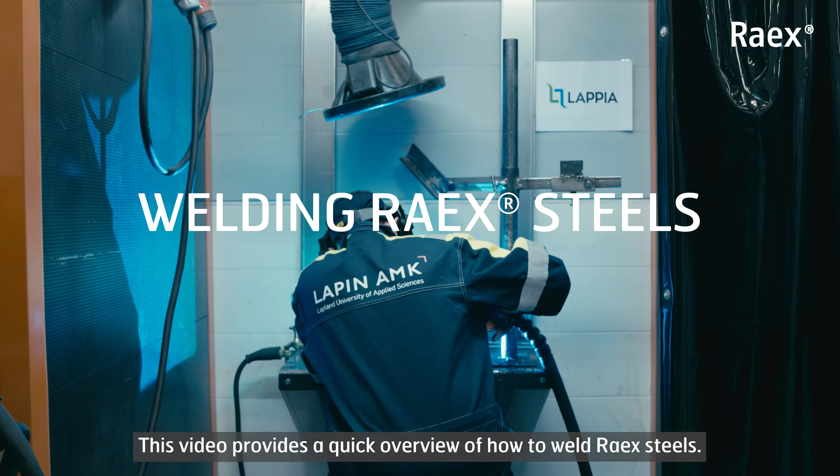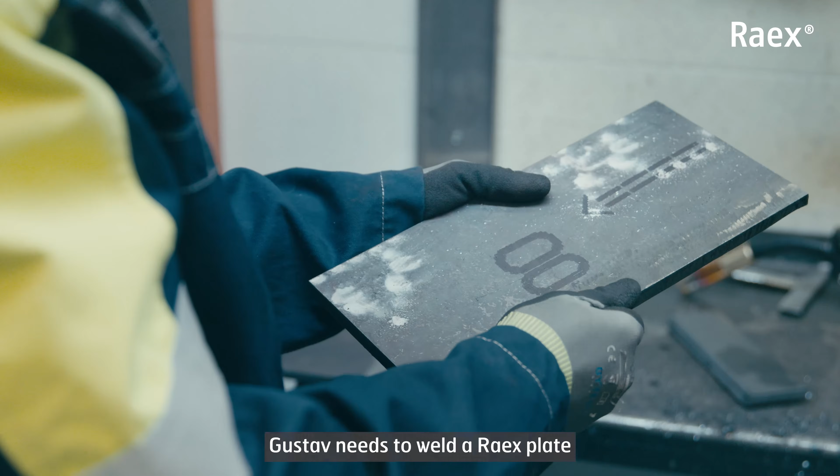This video provides a quick overview of how to weld Raex steels. This is Gustav. He is very particular about his appearance and his work, which is making high-value steel parts. Today, Gustav needs to weld a Raex plate to build an upgraded wear part for his mining customer.

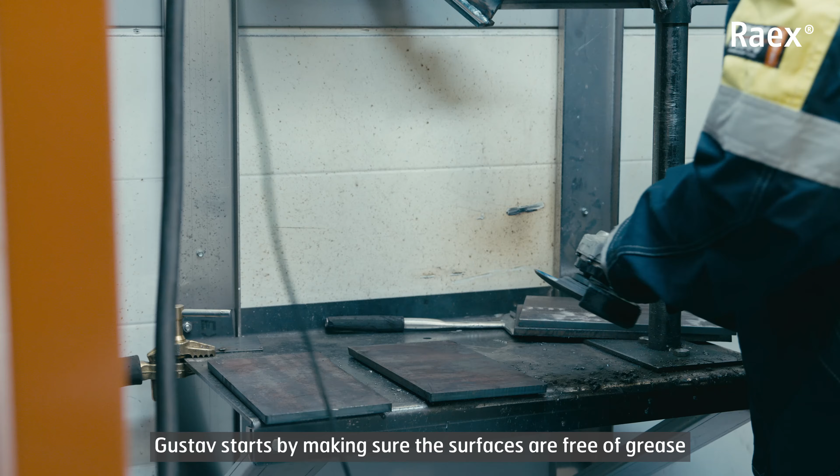Raex is ultra-high-strength steel, so Gustav knows that he must use a low-hydrogen filler metal and the right cooling time for reaching optimal properties for the welded joints. To also reduce hydrogen at the weld spot, Gustav starts by making sure the surfaces are free of grease, scale, oil, dirt, moisture, and paint or primer.

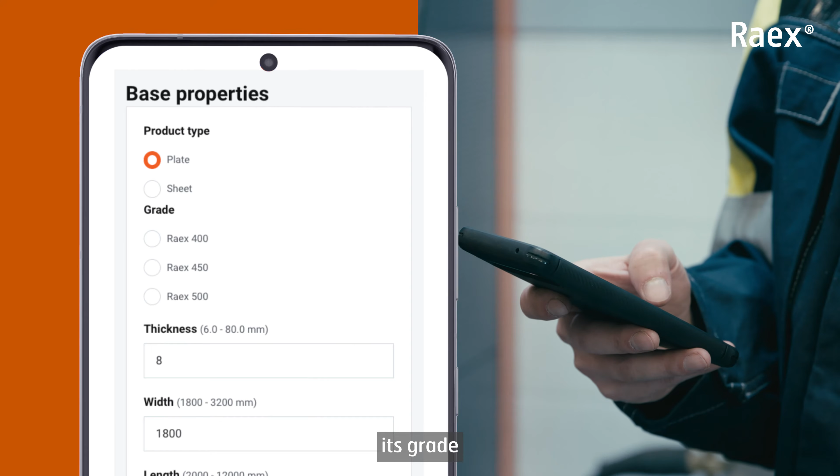To find the recommended working temperature, the amount the plate needs to be preheated prior to welding, Gustav uses the Raex Smart tool at raexsteel.com. On Raex Smart, he enters the product type, its grade, thickness, width, and length. Raex Smart immediately informs Gustav of his preheating temperature in centigrade.

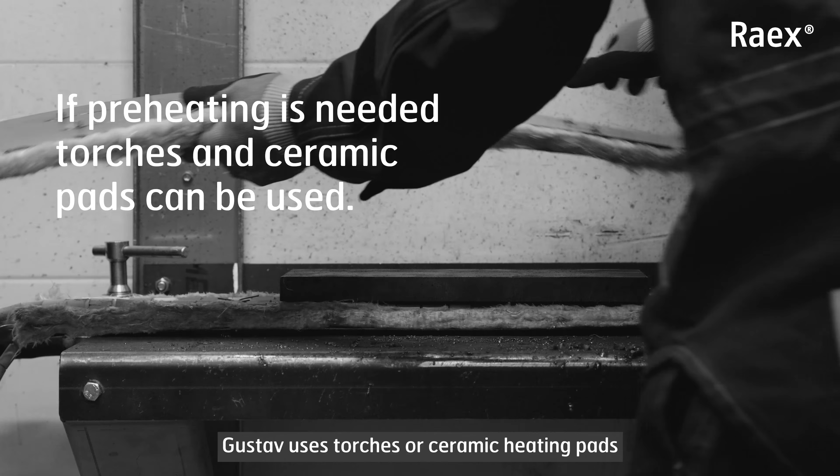In all cases, the steel must be at least 20 degrees centigrade. If the steel isn't 20 degrees centigrade, or Raex Smart recommends a higher temperature, Gustav uses torches or ceramic heating pads to achieve the necessary temperature.

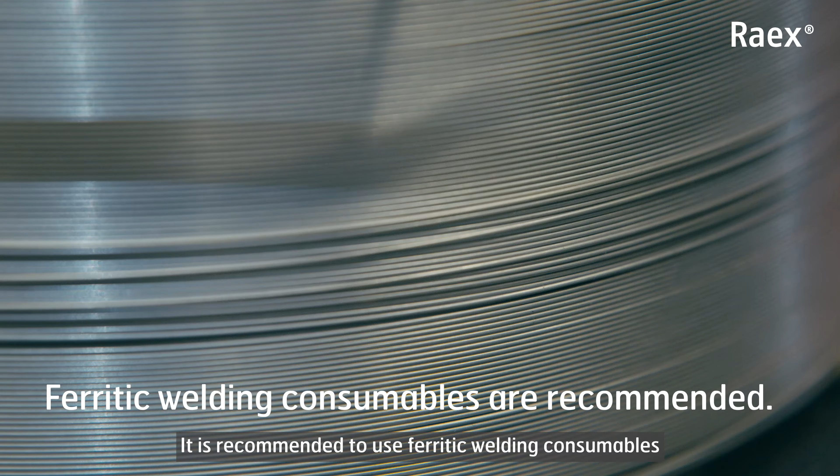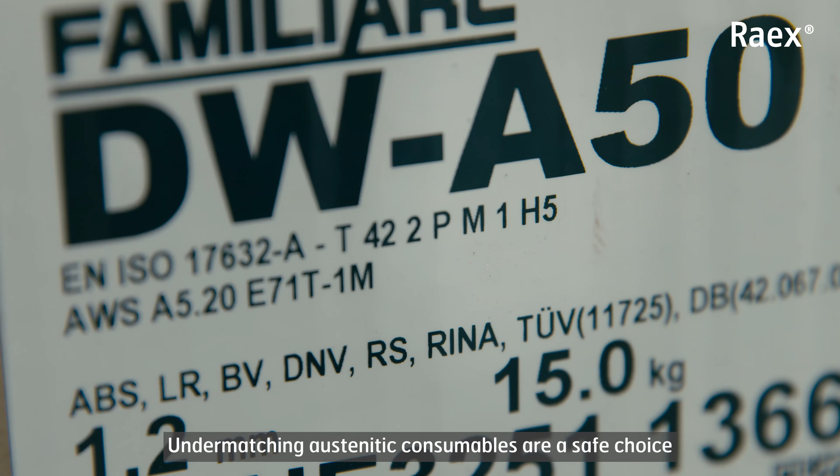Welding consumables for mild steels can be used for Raex steel. It is recommended to use ferritic welding consumables with a low hydrogen content, less than or equal to 5 milliliters per 100 grams. That is, a hydrogen content class H5. Undermatching austenitic consumables are a safe choice, especially for repair welding.

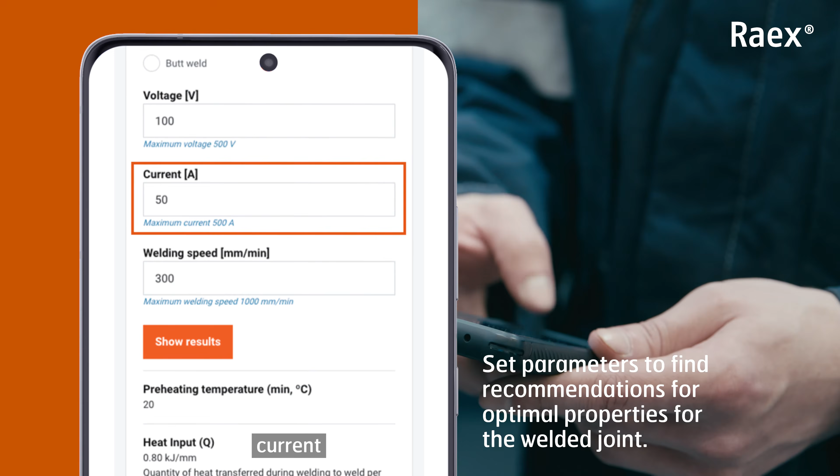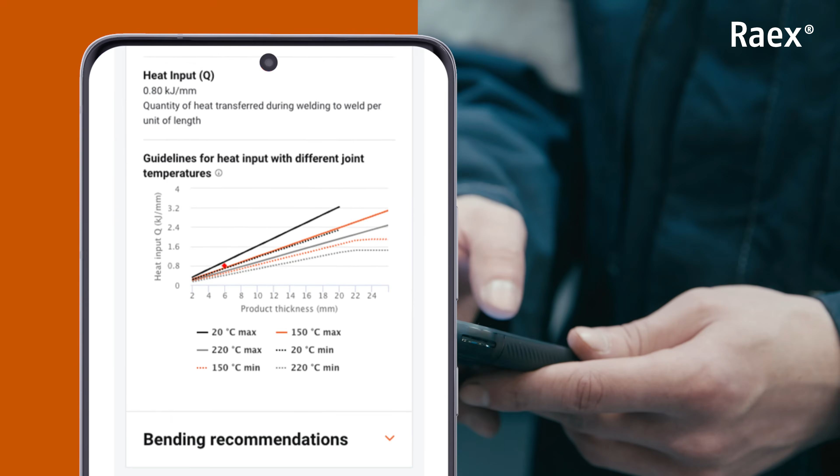He then goes to the Raex Smart tool and selects his welding method, joint type, voltage, current, and the welding speed. This way, he can find the recommended minimum preheating temperature and heat input to reach the optimal properties for the welded joint. Guidelines for heat input with different joint temperatures can also be found on Raex Smart.

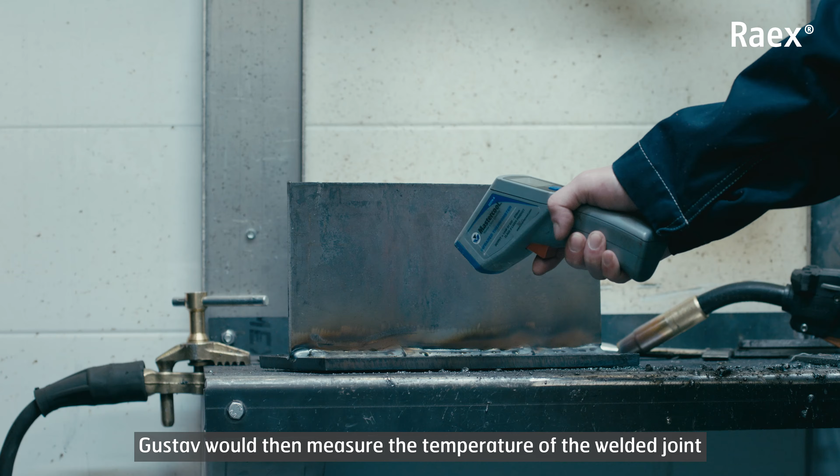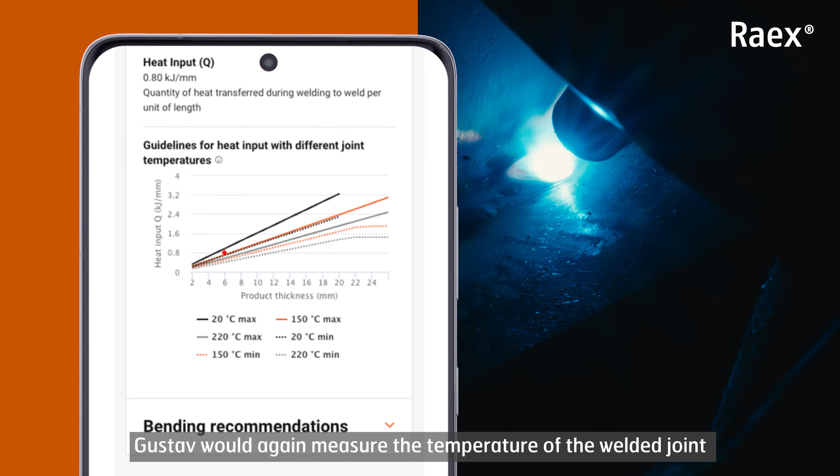If doing multiple interpasses, Gustav would then measure the temperature of the welded joint and then use Raex Smart to determine the heat input based on the temperature. For the third interpass, Gustav would again measure the temperature of the welded joint and use Raex Smart to determine the critical working temperature based on the Smart chart.

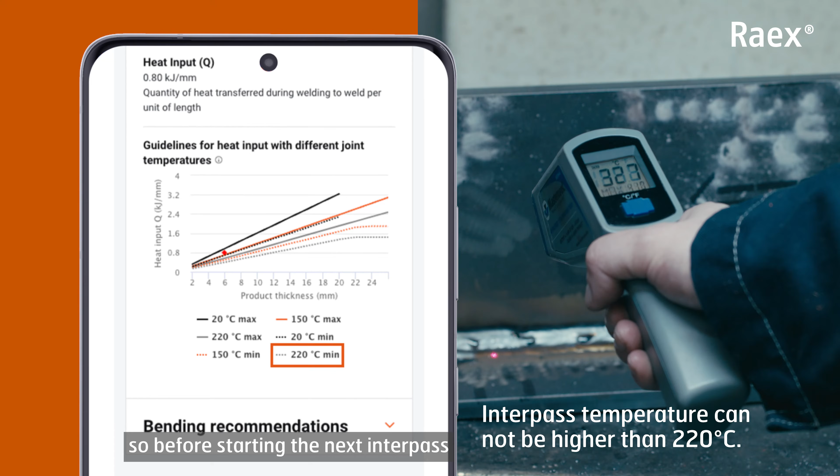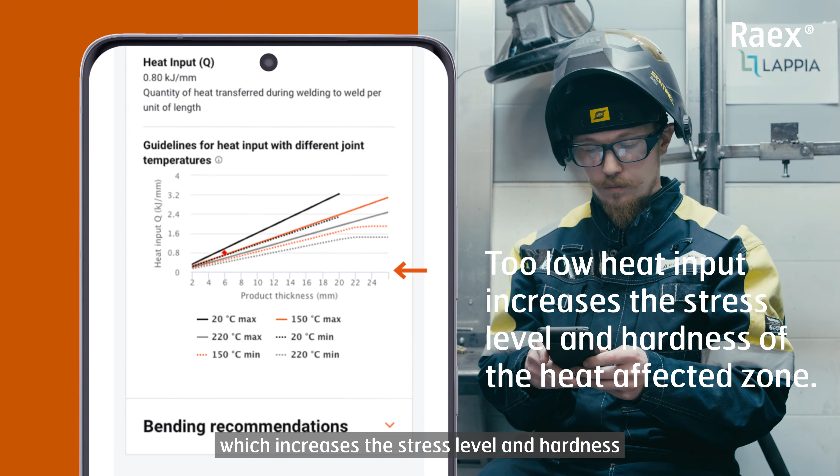Interpass temperatures cannot be higher than 220 degrees centigrade, so before starting the next interpass, the temperature must be below 220 degrees centigrade. If heat input is too low, joints cool down too quickly, which increases the stress level and hardness of the heat-affected zone. If heat input is too high, joints cool down too slowly, which decreases the hardness, strength, and impact toughness of the welded joint.

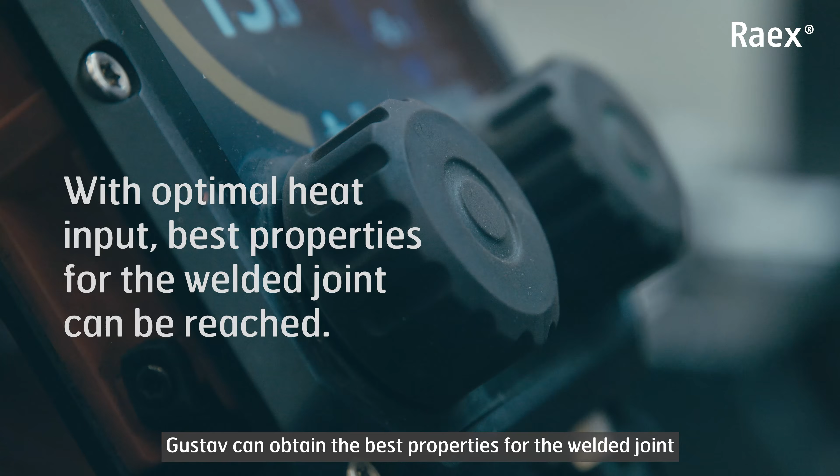During all stages of welding, the temperature must be kept uniform across the entire part. With optimal heat input, Gustav can obtain the best properties for the welded joint, and he can be sure that the weld will not fail during the service life of the part. Raex steels are compatible with virtually all welding processes, and welding is straightforward when following the Raex recommendations.

If Gustav has a particularly demanding or unusual weld, he contacts his material supplier. But most of the time, he just needs to use Raex Smart, with its interactive guidelines for both welding and bending. By using the recommended welding consumables, even the most demanding structures can be fabricated using Raex steels.